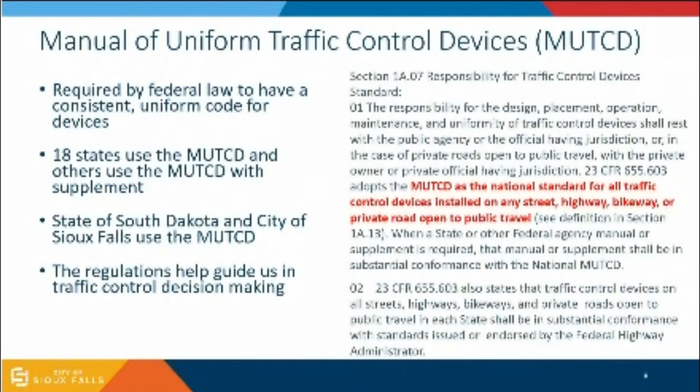This is in the Code of Federal Regulations as the national standard for traffic control devices on streets open to travel. The state has also adopted this, and we have it in our city ordinances that we follow the MUTCD. Most states follow the MUTCD as it's written, though some have supplementals, such as California changing the color of some of their school crosswalks to fluorescent yellow-green, which is a supplement to the manual. But the idea is that everybody tries to follow the manual so things are the same whether you're in California, Vermont, Kentucky, or South Dakota, so people see the same things on the road and it's easier for them to understand what they're expected to do when driving.

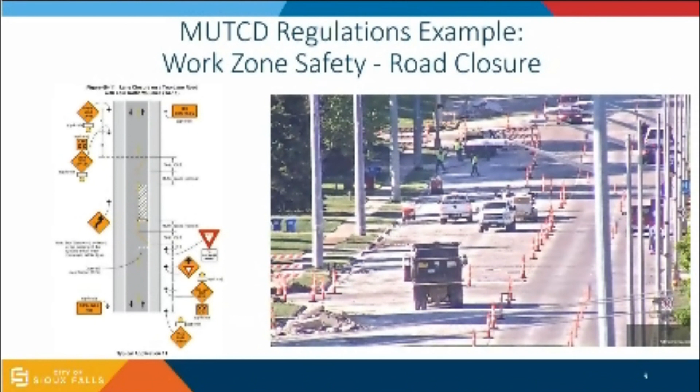We do a lot of work with our CIP plans and with contractors doing work, including traffic control plans, trying to make sure that what they put out on the road is safe for the public so that everybody understands what we want them to do going through the work zones.

So going through some of our assets, the first is our traffic signs. We have over 43,000 traffic signs in the city of Sioux Falls, and it's about a 15-year replacement cycle for the signs. To figure out when we need to replace them, we keep track in our asset management of when the signs were installed, so we know how old they are at all the different locations. We also use a retroreflectometer for testing how reflective the signs are.

Another interesting thing is that we do a lot of sign production in the city of Sioux Falls. We have equipment set up so that most of the signs that aren't typical, we make ourselves at our sign shop, like street name signs, since every one is different, and parking signs, since there's a lot of variability in those. We make those at our traffic shop, print out the faces, and put them on the aluminum blanks.

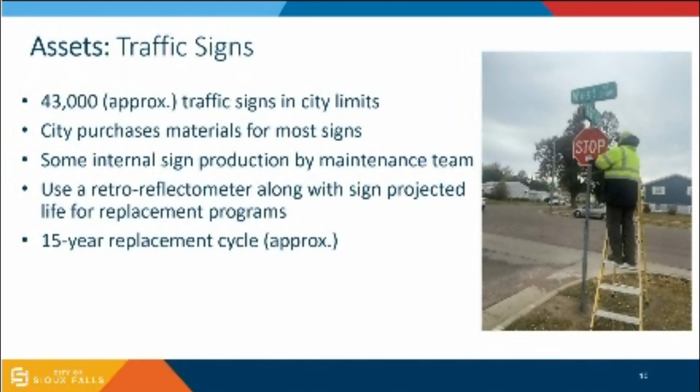We also have a lot of blank aluminum blanks sitting in our sign shop, and we'll order sign faces for more common signs like stop signs and yield signs, keeping those in a drawer. We pull out the face for the stop sign, put it on the aluminum blank, and press it on to make the sign. So in a way, we make all the signs we put out on the street, but we print probably a little over half of them and order the others. Just some interesting things on what we do with our signs.

Next is our pavement markings on the streets. There are over 3,000 lane miles in Sioux Falls, and we have over 500 miles of 4-inch lines running throughout the city. The interesting thing is that yellow pavement markings separate traffic going in different directions, while white pavement markings separate traffic going in the same direction.

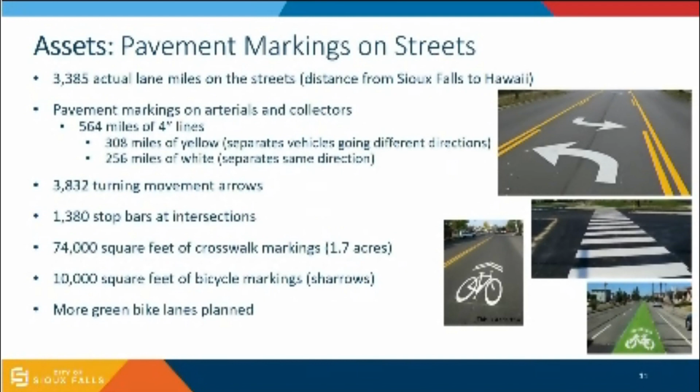We have over 3,800 turning movement arrows, 1,300 stop bars, 1.7 acres of crosswalk markings throughout the city, and 10,000 square feet of bicycle markings. There's more of this downtown, where we've got a lot of spots with bike markings that have a green background underneath them, and we're planning more of those in projects over the next few years.

Some of our other big assets are traffic signals. Back in 1983, the city only had 102 traffic signals. Now, 40 years later, we have exactly 300 traffic signals in the city of Sioux Falls, meaning 300 intersections where we're maintaining controller cabinets, and half of those have battery backups that we've put in place. All new intersections get battery backups now when we're putting them in, so that small power outages don't leave intersections dark, and it's something we plan to keep doing going forward.

At this point, over 99% of our signal indications have LEDs in them. We also brought a 5-section signal head for you guys to take a look at. People always find that interesting, and I think they find it's a little bigger than they expect once they get an up-close look at the signal heads.

Nationwide, there's approximately 300,000 traffic signals in the U.S. On average, most metro communities have about 1 traffic signal for every 1,000 people. We have a few more than that in Sioux Falls, and the big reason is that Sioux Falls is a regional area, an attraction, a draw. We might have a little over 200,000 people for our population, but with people coming to town for visiting, shopping, and working, it's over 250,000 in the city on a typical day. So that's why we have more traffic signals than we typically would for our population.

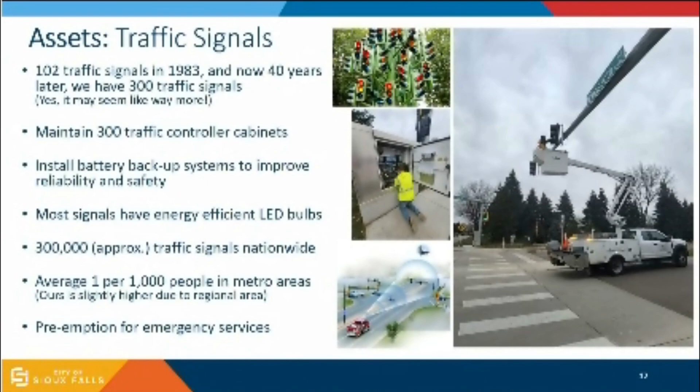Another thing we have on most of our traffic signals is preemption for emergency services. We brought our handheld emitter that we use for testing. When you guys ask, can I get one of these? That right there would do it for you, turn the signal, so.

So we use that for testing the intersections.

Right now approximately 40% of our signalized intersections have video detection of some sort, and that's where we're going, moving towards video detection. Two of the big reasons for that are motorcycle and bicycle detection. The traditional loops, magnetometers, wireless sensors, and other things we've used through the years just don't do a very good job of detecting motorcycles and bicycles. We're trying to go with video detection because it does a better job of detecting those smaller vehicles.

Next in our assets is our communication network. The city has fiber throughout that we use to connect to many of our traffic signals. We also use it to connect to a lot of city buildings, such as this building, City Center, City Hall, and many of our major city facilities. We have a fiber network run between all the buildings, and then we hop into all our traffic signals as we go along. In total, throughout the city, we have about 125 miles of fiber optic cable that we maintain, and that's our guys back here on the traffic maintenance team doing everything needed to maintain that fiber.

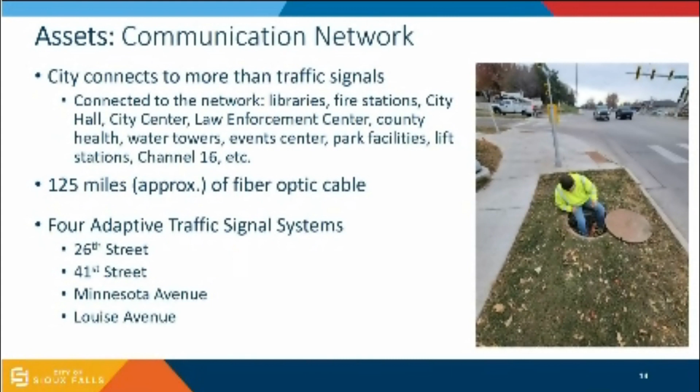We have the 4 adaptive traffic signal systems on the fiber through the city, which are East 26th Street, 41st, Minnesota Avenue, and part of Louise Avenue. Continuing with the communication network, on the right is a map showing where the fiber runs throughout the city. One of the things we're constantly working on is redundancy, getting more fiber in corridors where we don't have it, so we can build loops so that if we lose a piece of the network, we can loop around and keep facilities going. We have backup microwaves that IT uses too, but that's a lot slower communication. So we're trying to build out the fiber network to keep faster communications through all the city buildings. About 70% of our traffic signals are connected to fiber, and about 90% of the city facilities are connected to the fiber system we maintain.

Managing and maintaining our city's assets, one of the things we do is count traffic out on the road. We partner with the DOT to count approximately 650 road segments every year for 24-hour counts throughout the city, on the collectors, arterials, and interstates that range throughout our city.

We're also collecting turning movement count data from over 100 intersections every year, on about a 3-year rotation, where we use that data to look for signal warrants or if we need to make timing changes or adjustments at intersections. That's using these cameras that we set up at the intersections on the poles, then we take them down and move them to other intersections. It's kind of a mobile camera system, able to move around to different intersections and set up to collect data that we use for getting that turning movement data. I'll talk a little more later on what we use that data for.

Every year we have our annual long line painting program, where we go out in the spring and repaint the 4-inch wide yellow and white lines that are the regular waterborne paint. We go repaint those every spring, and then do some touch-up work in the fall, depending on if it's needed in areas or what's been overlaid. We try to keep up with that program and touch up whatever we need to with the long line paint.

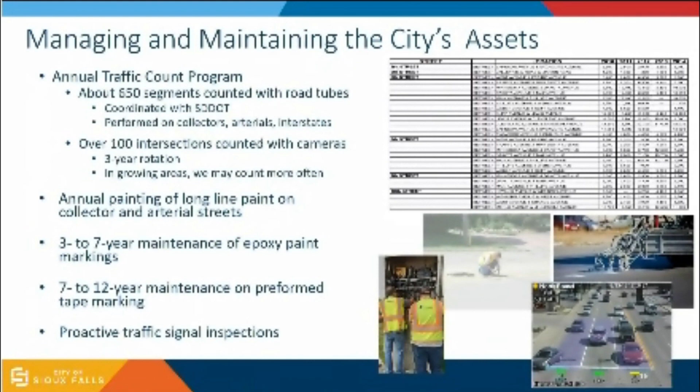We're working with Ryan's group more and more on trying to do proactive signal inspections. Every year we're going through every intersection, and there's a conflict monitor in every traffic signal cabinet—this little box that reads the voltage on all the lines going out into the field, and makes sure we don't get greens from two directions that shouldn't be green at the same time. What it does is make the signal go into flash if it detects that. We have a program where we take that device every year, rotate it out, and we have a device back in the office that certifies it's working correctly and capturing everything correctly. Once we've certified it, we rotate it into the next intersection and do a continuous rotation switching those out. That's part of our proactive maintenance program for the signals.

One of the things we're always trying to work with is managing resident expectations. For the last 25 years in our long-range transportation plan, we're always reaching out to try to get information and feedback from the public, and improving the timing of traffic signals is one of the things people are always willing to spend money on in those surveys—meaning they want us to get them better, they want to see greens. In the last 30 years there have been many advances in traffic signal operations and how the equipment works. The signals are getting smarter, and we have a lot of things running so hopefully we can get people more green time and less delay. But one of the things we have to deal with is that it's hard to build ourselves out of congestion.

A lot of people talk about induced demand, where when we start building out intersections or roads, that brings more traffic onto those too, where you're kind of always going to see that increase in traffic, and it can get hard to build out of congestion. People get comfortable with a certain level of congestion along a roadway, and then they'll just keep coming to that roadway until they've hit that level. So it's interesting with speeds and driver behavior, where it's just kind of a hard thing to build out of. But we're always working with perceptions and trying to optimize traffic throughout the city.

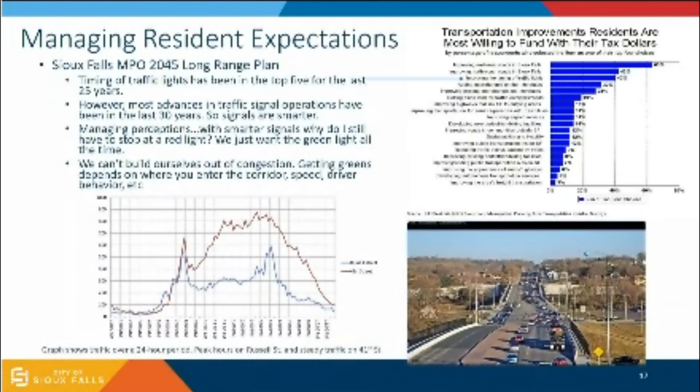The interesting thing with the intersections gets into driver psychology. We try not to take an uncontrolled intersection and put stop signs on it unless there's a reason to do so, because if there's no crashes occurring at an intersection, and if there's not sight distance issues, and we don't have heavy traffic volumes, people will have a perception that maybe that stop sign is not really needed, maybe it shouldn't be there. Then people have a tendency to start putting less value into the stop signs they do see. So that's one of those things where we try to put stop signs where they're needed, to make it so the public does a better job of obeying the ones that are in place. So if you've ever wondered why we have a lot of uncontrolled intersections, that's part of the reason.

We went back and looked through the last 3 years on our resident concerns through our SeeClickFix and CRM system, just to give you information on what we're talking to the public about, what they're contacting us about, and what conversations we're having.

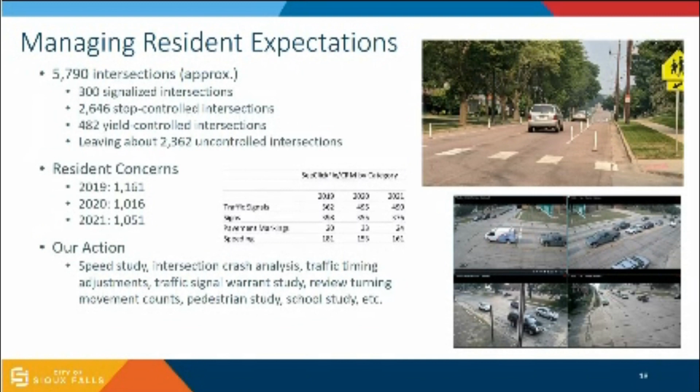With the different concerns and things, we do a lot of different studies, looking at counting data, getting speed from areas, doing school studies. We'll do all kinds of different things depending on what the public's asking for at a location and what we need to do to look at it.

Here's some of the other tools that we use for different things. We use access management principles along the roadways. We have different high crash areas, and when we identify high crash areas, we look for immediate solutions. One of those we recently did was on Louise Avenue, south of 69th Street, where Avera, Lewis, and Culver's all kind of come together. We changed how the median was done at that location, closing off some access, because we had a lot of bad crashes occurring there.

Medians is one of the things used for capacity and safety. Roundabout considerations. We do a lot with our traffic model, where we model future traffic projections, especially when looking at studies, future improvements, and traffic impact studies for businesses, or if we do ourselves, we'll look at detour impacts if we're closing a major road, and what kind of traffic impacts that could have on other intersections in the area. We'll look at traffic classifications, whether roadways are arterials, collectors, or local streets, and we do quite a bit with long-range transportation planning also.

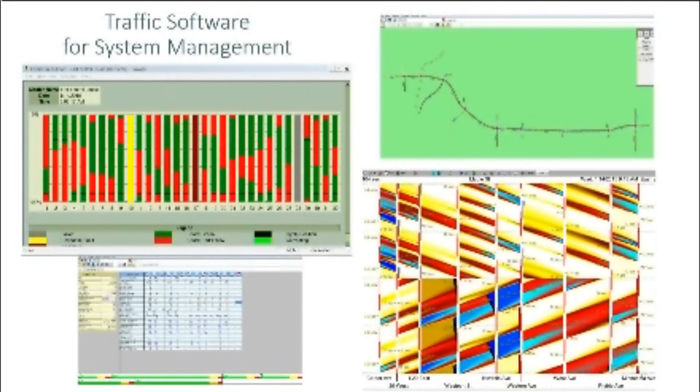Right here is a quick overview of some of the software we use for managing our traffic. So the first thing we do, if we're looking at an intersection and want to look at improvements or optimizing it, is we need to go get that 13-hour turning movement count for the intersection. We've got a 3-year rotation that collects that data, so whenever something comes up, we usually have data within 3 years old or less. When we want to pull it in to look at something big we're trying to analyze, we may go get fresh data for the intersection.

So the first thing we'll do is take the count data we got for the intersection, and then we'll also look through the crash data available for that intersection to see what kind of crashes are occurring. Once we have our count and crash data, in the upper right-hand part of the screen you can see a network map - that's Russell Street, where we built out the network. It's got all the lanes and geometry of Russell Street, all the turn lane lengths, everything built into it.

Once we've got that network built, we'll go into the lower left corner, which is the data entry for each of the intersections along that corridor, where we'll put in the count information we've collected.

A lot of times we'll also look at the intersection for things that make a difference in how they operate - saturated flow rate, which is basically how fast people are willing to move through an intersection, and startup loss, which is how quickly people start up from a stop at an intersection. It's interesting, as cities get bigger, those numbers usually get bigger for the flow and smaller for the loss, since drivers start being more aggressive.

Once we've built that out at the intersections, some of the things we'll look at are warrants for locations that aren't signalized - should we signalize it based on the count data and crash data that's available?

A lot of the other things we'll do is look at phase changes, such as requests for adding left turn phases at an intersection - that's a common request in different areas. We look at many different things, such as delay and how it changes the operation of the intersection, crashes that have occurred, and how many people are trying to turn left versus how many are opposing those left turns. We also look at what kind of offset that left turn has, sight distance wise, for the approaching movement. So those are a lot of the different things we consider when deciding whether to change left turn phasing at an intersection.

And then one of the other things we'll do is work on optimizing the timings for an intersection, where in the software we can go in and either give it a longer cycle length so we can give a little more time to the left turns, or take 2 seconds from this turn and give it to the through movement.

There's a lot of things that we start adjusting and trying at the intersections, trying to optimize the overall delay for everybody throughout the intersection. So, in the upper left corner, it shows a software snapshot of our tactics software that we use for monitoring if the intersections are working correctly and in sync like they should be.

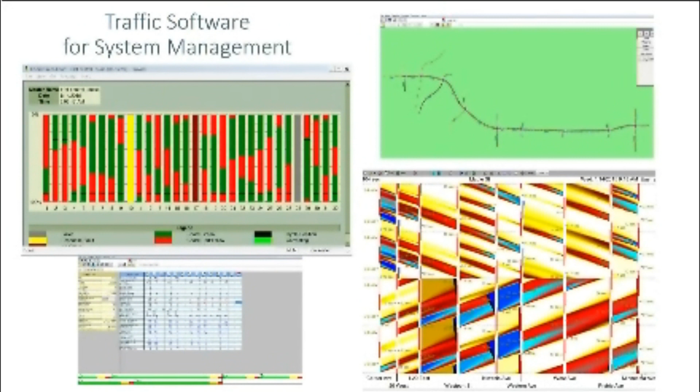The interesting thing here, when we're talking about flow on these corridors, is that we're talking about cycle lengths and access management. One of the things we always try to do is keep quarter mile and half mile spacing on traffic signals. One of the biggest reasons is that you get natural frequencies for timing plans, for what cycle length works best, depending on how far apart your intersections are.

If your intersections are really close together, you have to have really short cycles, and if they're far apart, they start having to be potentially longer cycles. But if you have intersections with really irregular spacing, there's no natural frequency at all going through those corridors. That's one of the big reasons we push in new construction to have signals at the half mile and quarter mile locations, so that people 20, 30 years from now can easily build 90-second cycle plans going from one intersection to the next, much better than we do on some of our older corridors throughout the city where we have very irregular spacing.

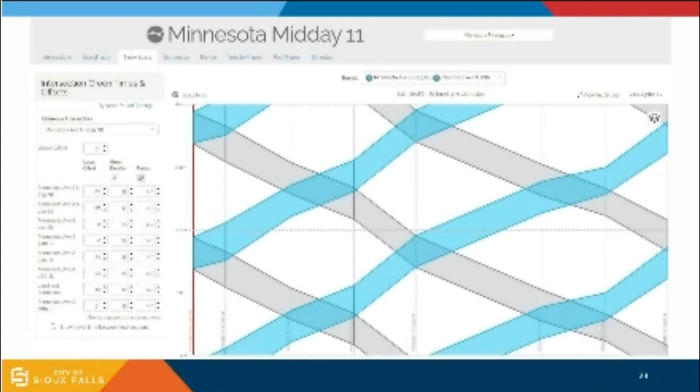So this was the AM peak on Minnesota Avenue. This is the midday flow chart going through the intersections, and this is the PM peak on Minnesota Avenue, where you can see we've got a bigger southbound flow, trying to push more traffic southbound in the PM peak.

That's a big part of when we're doing those 13-hour counts, trying to capture what kind of flow rates and directions we see on corridors. On Minnesota Avenue, the AM peak's in place from 7 to 9, midday from 9 to 3:15, then from 3:15 to 6:30 the PM peak's in place, then it goes back to midday for the end of the night.

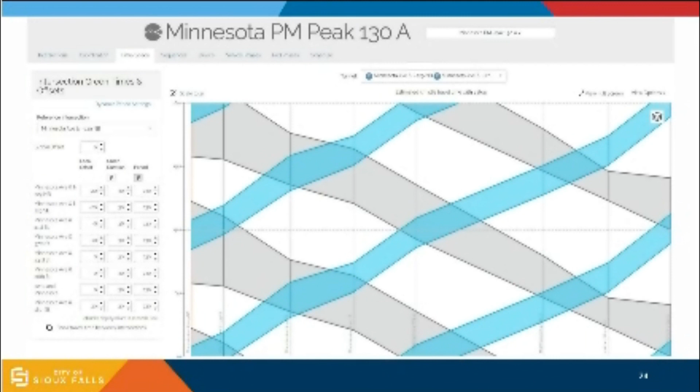So that's the slides that we had to go through. We're here to answer any questions that you have, me or team members, if it's something for them.

Well, thank you very much, I appreciate it, it's very informative. If this is Traffic 101, I will poll the council members to see how many of them actually want to get to the next 4 hours of discussion. That's clear, and we'll see if we want to do it in small groups or that.

Very informative. This time, councilors, questions. Councilor Selberg. Thank you, Mr. Chair. Thank you, Heath, fun presentation, you seem like you enjoy your job. I do. Could you guys not find a 3-prong plug-in for the stoplight back there? We actually have one that plugs in, I don't think we brought the one that plugs in.

So there are 43,000 traffic signs in the city, and you guys know exactly how old each one is and the history on every one of them? It's about 36,000 of them are in our GIS system, so we have the data on how old they are. There's a few that, when we made the transition, aren't in there, but those are really old ones we're working on getting out.

One of the things I've been working on, and we need to do more work on, is trying to reduce sign clutter. There's a lot of areas where, years ago, the no parking sign was put up on every single light pole. So we're trying to go into areas like that and pull a lot of those signs down to open up the space more, so we're not cluttering things up with signs as much. The less signs you have, the more people pay attention to the ones you do have out on the street.